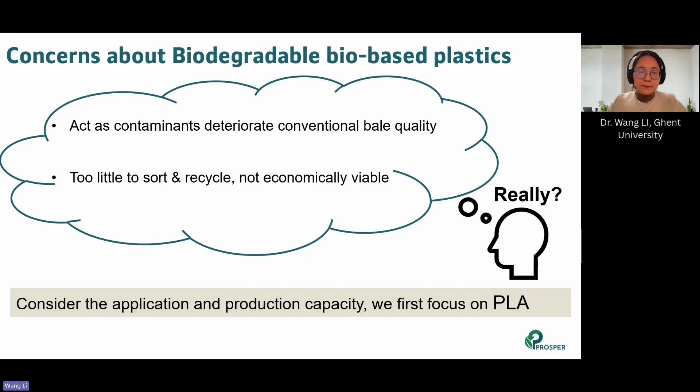Initiated by these gaps, we chose a clear starting point to focus on PLA first, which is the dominant bioplastic in the current market. Let's go through the details of what we did to answer the question: does PLA contaminate other plastic recycling streams?

What the model can provide.

So the model provides not only allows us to track where the material goes, but also gives information about how much of the material can be recycled and the quality of the recovered streams. This allows the waste manager and the recycler to track the sorting performance at the process level and pinpoint the hotspot for material loss.

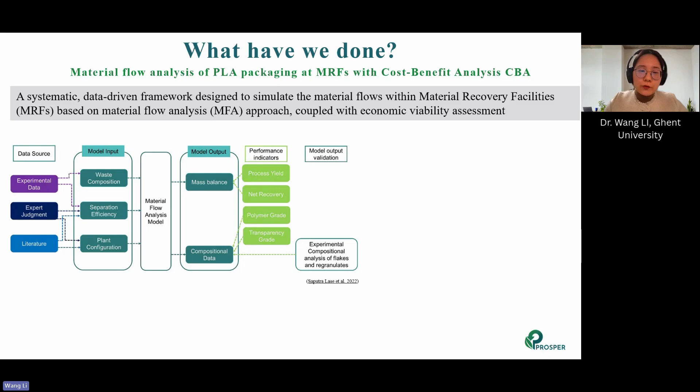And also regarding the economic feasibility of sorting PLA, we coupled a cost-benefit analysis to tackle the question: is it economically feasible to sort PLA? If so, at what scale?

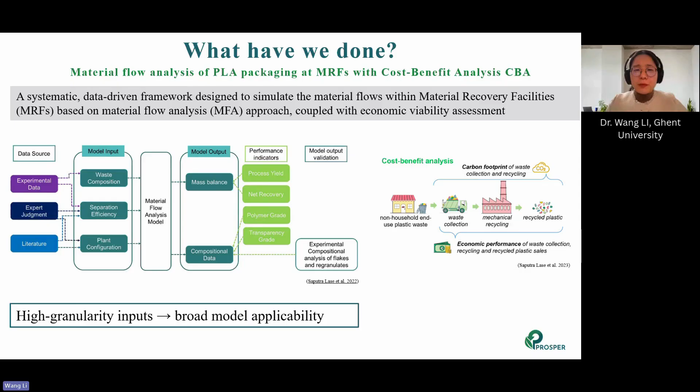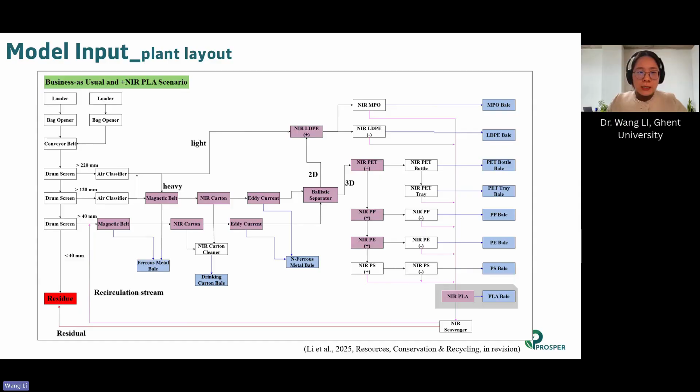Now the second main input for the model is the waste composition. We estimated the waste composition of different packagings within the MRF input based on the amount of packaging placed on the market, and also waste characterization data from previous work.

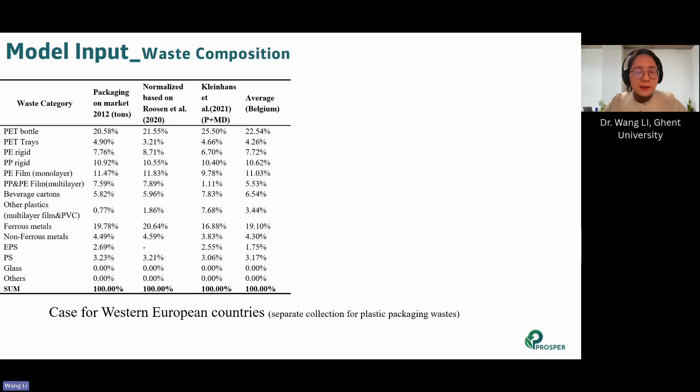Since we didn't find any publicly available data regarding the bioplastic or PLA percentage in the current mixed packaging waste, we estimated it based on the fraction of PLA production within global plastic production, assuming the same waste generation and collection rate for both bioplastics and conventional plastics.

Accordingly, we calculated that for 2023, around 0.12% of PLA packaging waste is expected to occur at the MRF input, and it will grow to 0.41% by 2028 if we take the most optimistic annual growth rate based on European Bioplastics production for PLA.

Okay, now let's move to the last main sorting input parameter: the sorting efficiency. Benefiting from the work done by our group and close collaboration with SUEZ and Test Center NTCP, we have a well-established database of sorting efficiencies for more than 200 products, including detailed products, parts, dimensions, and polymer types. You can find more details in the reference here.

And for the near-infrared sorting of PLA, we found from the literature that several lab-scale studies have reported relatively high sorting efficiency, above 97%.

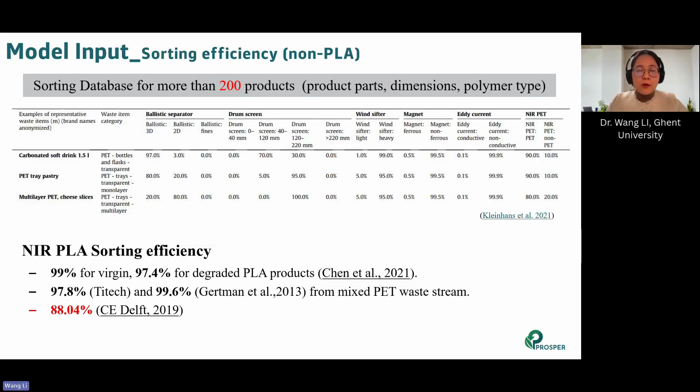However, we consider that in a real case, when there's real mixing and contamination on the surface, we should choose a moderate sorting efficiency, which is reported in the CE Delft report, also based on the sorting trial conducted by NTCP. So 88% is the value we assume in our model for that near-infrared PLA sorting efficiency.

And for the PLA items we put in the model, we selected 21 market-available packagings, including different dimensions, different shapes, from bottles to cups to lids, and also different colors, including black items.

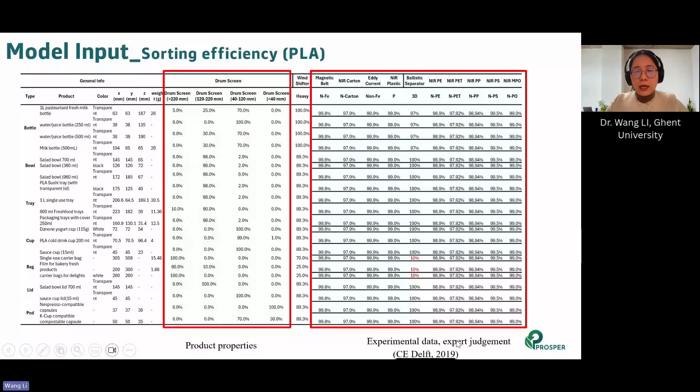And for the sorting efficiency, like the drum screens and wind shifter, we based it on the material properties, and for others, it's mainly based on the experimental data from the CE Delft report, and also expert judgment from waste management companies and sorting experts.

Now it's all about how the model is structured. Let's take a look at what kind of results the model can provide. As I highlighted before, the model allows us to track the sorting performance at process level.

Here's an example for PLA milk bottles, single-use trays, and PLA films. We can visualize how efficiently certain units separate the target materials, and we can also assess how much material ends up in different bales, to assess bale quality and potential contamination.

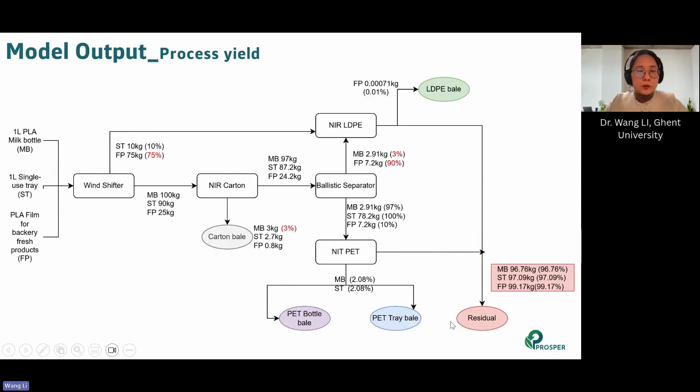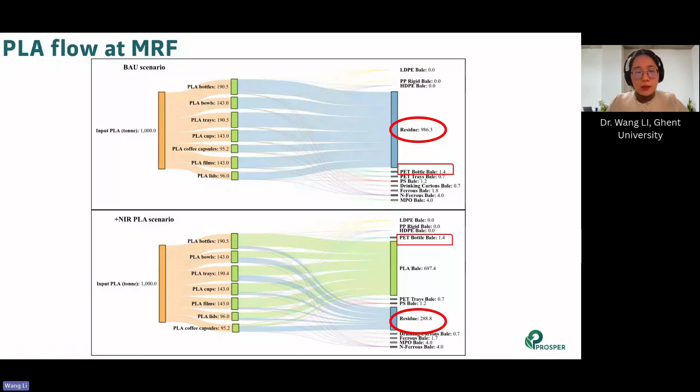To also accommodate the future scenario where there's expansion of PLA applications in packaging, we did a scenario analysis.

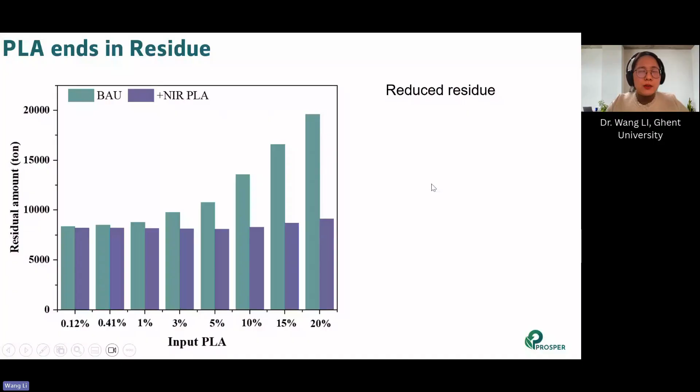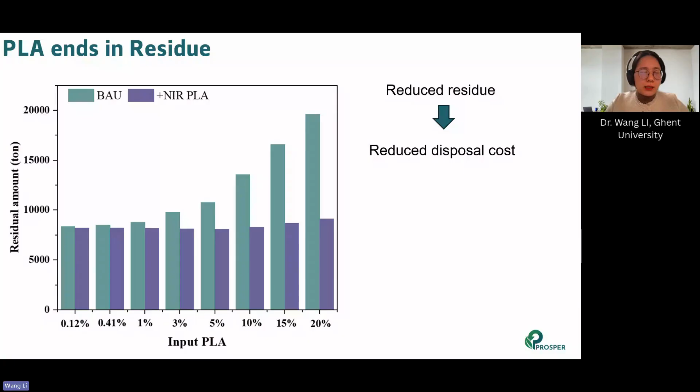And the reduced residual amount is closely associated with disposal cost, because the residual from sorting plants normally gets disposed in landfill or incinerated for energy recovery. This is also associated with greenhouse gas emissions and environmental impacts.

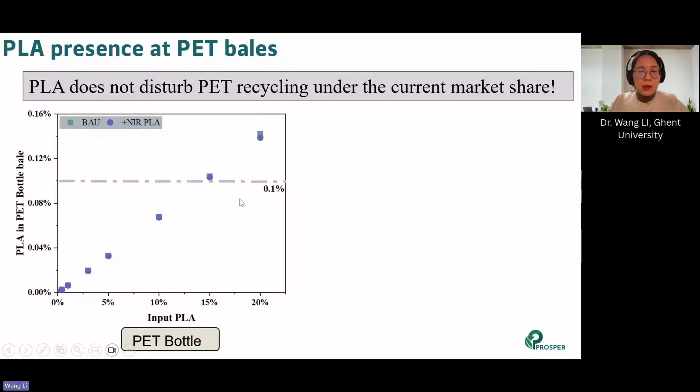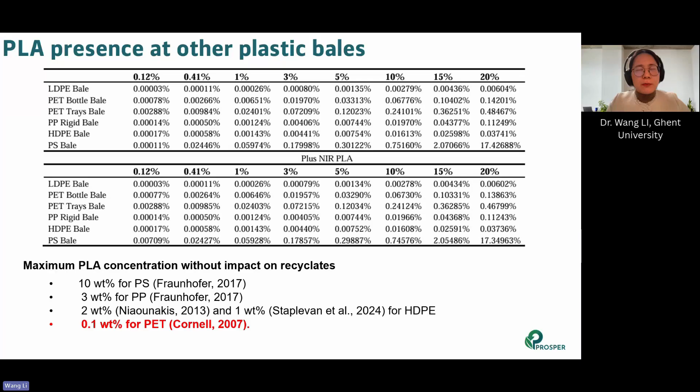So, to conclude, PLA is not a problematic issue, and there's no risk of contaminating other plastic recycling streams. It's clear that from a technical perspective, there's no problem sorting PLA, and no contamination issue in current or even future scenarios.

However, for actionable business investment plans, we need figures. So now let's talk about numbers.

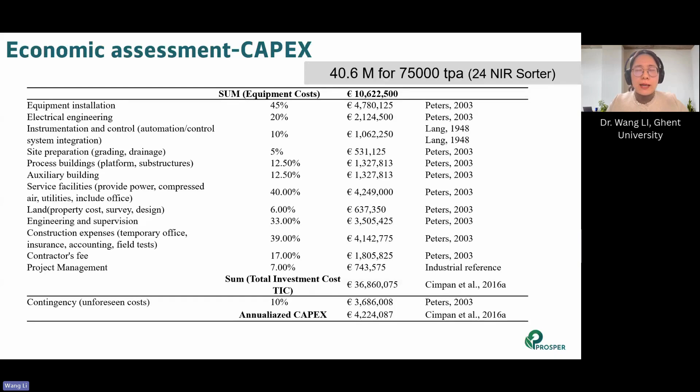For the defined sorting system we showed, with an annual capacity of 75,000 tons per year, we estimated the capital investment is around 40 million euros for a quite highly automated system. We also estimated the operational cost, and overall we can get the sorting cost.

We're also aware that the conclusions from this assessment are very sensitive to the cost parameters in the model, because all the cost figures are very country- or case-specific—for example, labor cost varies a lot even within Europe. So we also coupled this with a sensitivity analysis to accommodate this uncertainty in our cost-benefit analysis.

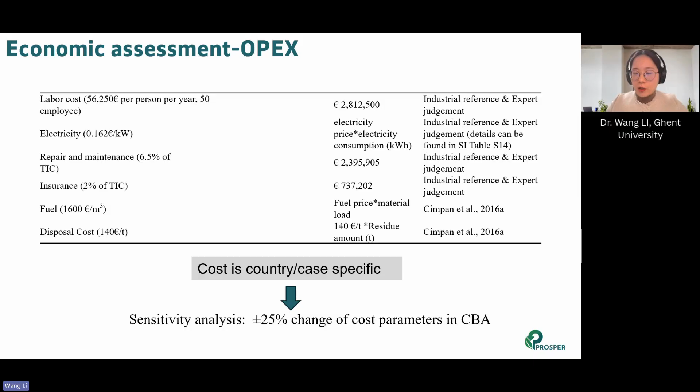So this is the economical part. Now let's go to the results regarding PLA sorting.

This figure shows the overall plant sorting cost, indicated in yellow, and in red represents the overall plant sorting cost in the business-as-usual scenario versus the near-infrared-plus scenario. The star here indicates the PLA sorting cost.

As you can see, at the current low PLA market penetration, the PLA sorting cost can be above 1,200 euros per ton. This confirms that from a pure economic point of view, there's no benefit—it's not economically sensible to invest in PLA sorting. However, we also see that with increasing input PLA, there is a sharp decrease in the PLA sorting cost.

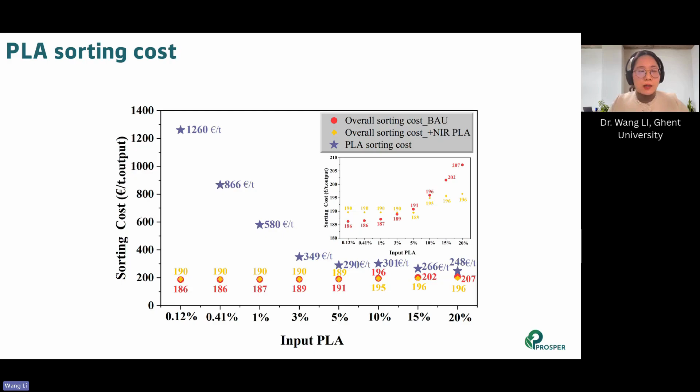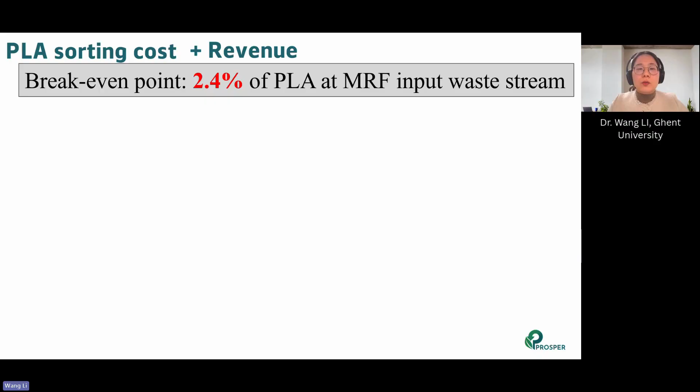This is the pure sorting cost without considering revenue. If we consider the revenue from saving disposable costs due to reduced residual amount, implementing near-infrared PLA sorting, and also the saving from sorted PLA, we find clearly that if the input PLA reaches 1% as defined in MRF systems, the net PLA sorting cost is only 170 euros per ton, and the break-even point can be achieved at 2.4%. Afterwards, profitable sorting of PLA can be achieved.

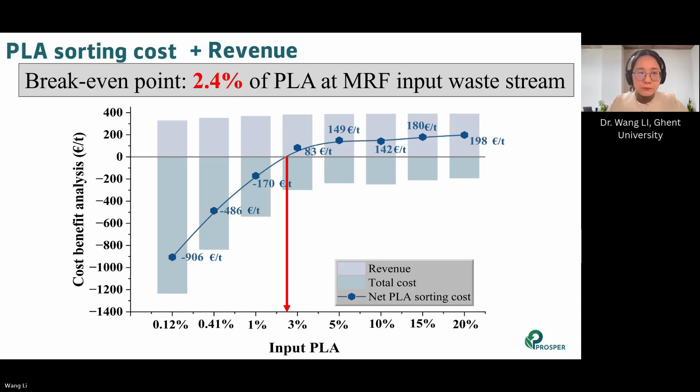Since the conclusion is very sensitive, we did a sensitivity analysis to identify which factors play a significant role in the viability of PLA sorting. As you can see, labor cost plays a significant role under low market penetration conditions, and its influence decreases as the input PLA share increases. This indicates that in countries with low labor cost, the required mass to justify PLA sorting is lower. However, as the input PLA amount at the MRF systems increases, the sorted PLA price and the disposable cost of residuals have a greater impact on the viability of PLA sorting.

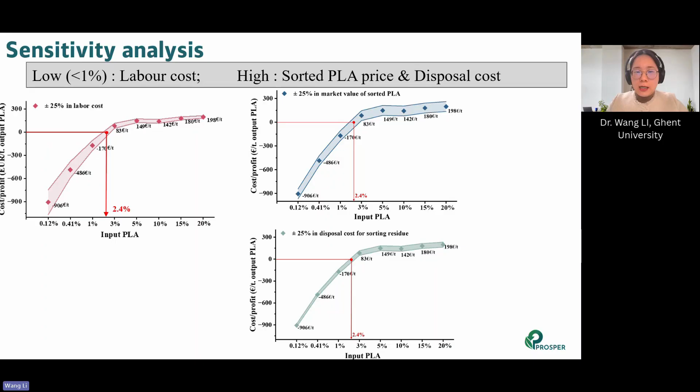Here is a direct overview showing how the break-even mass changes in correlation with disposable cost and the market value of sorted PLA. We set disposable cost in a range between 30 and 250 euros per ton, because some countries have more stringent landfill tax rules and high gate fees for incineration. For the market value of sorted PLA, we set it at 0, assuming no market demand, whereas we also assume a high demand scenario with policy support such as eco-modulation of EPR, design-for-recycling guidelines, and more legal requirements increasing market demand for sorted PLA. We set that range up to 500 euros per ton.

As you can see clearly, when there's high market demand and more stringent rules on incinerating or landfilling valuable bioplastic resources, less PLA is needed to justify the sorting investment. Whereas if there's low or no market value for sorted PLA, and also very low disposable cost for the residual, it's very far away from justifying sorting for bioplastic, especially for PLA.

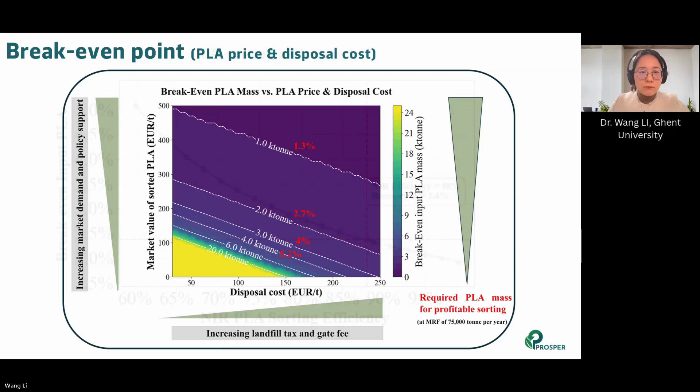As I mentioned before, we chose a moderate sorting efficiency near-infrared for PLA, but from the previous talk by Antoine from Pellenc, they mentioned that even partially composted PLA can be sorted at an efficiency around 95%, achieving a bale quality around 87%. This indicates that the break-even mass is also associated with the near-infrared sorting efficiency. The figure here clearly shows that the required mass for PLA to justify the sorting investment decreases along with improvements in near-infrared sorting technologies.

With the development of AI sorting, we believe that in the future, even in real household waste management sorting plants with all different mixed waste and residuals, high sorting efficiencies can be achieved. We expect that the break-even point can be achieved even earlier than 2.4%, based on our studies.

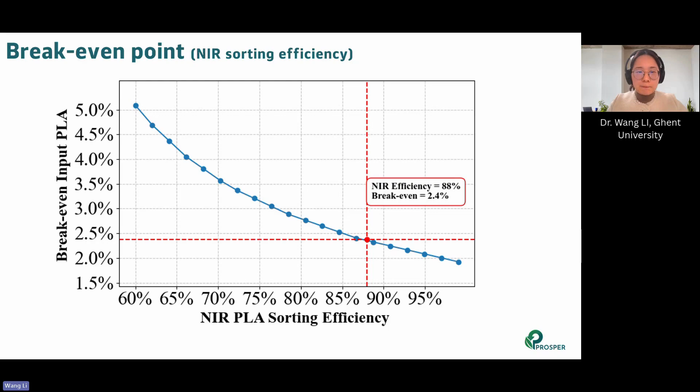To sum up, the take-home messages from our work: the first question is, does PLA contaminate other plastic recycling streams? The answer is that PLA is unlikely to disturb PET and other recyclable streams, even under current or future market shares. Through the economic assessment, we find that 2.4% is the break-even point where PLA sorting cost equals the benefits.

We also find that with improvement in near-infrared sorting efficiency, we could really lower the required amount to justify the investment decision for PLA sorting.

In the end, we find that the market demand for sorted PLA and disposal costs, for example the gate fee for landfill and incineration, have a great impact on the viability of PLA sorting. We expect that with more legal requirements and policy support, PLA sorting can be achieved at an even earlier stage.